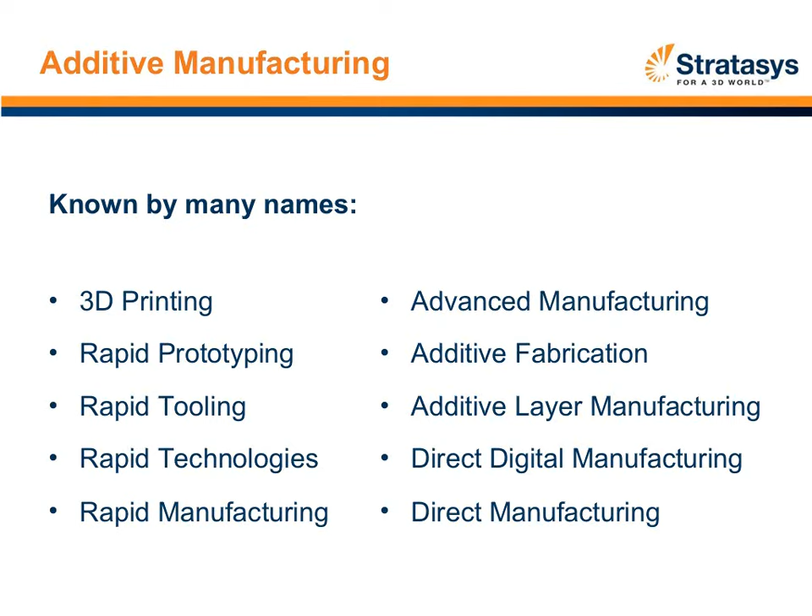So we at Stratasys, and through this presentation, will use the term additive manufacturing to refer to a collection of technologies that I'll explain in a moment. But many of you on the call or in the webinar may recognize some of these other terms: 3D printing, rapid prototyping, are commonly used terms to define what we today in the call will define as additive manufacturing. And what additive manufacturing is to us, it's a collection of technologies that are largely driven by three-dimensional digital data. That's the input. And what the technology does is in an additive process, or a layer-by-layer process, produces a physical part, generally used as a concept model, a prototype, and even in some cases for manufacturing applications directly from that three-dimensional digital data, typically coming from CAD.

So the process generally is three-dimensional digital data in, produce the part in the system or the technology itself, and then usually there's some post-processing that is required. Generally it's a support removal. It could be some other things dependent upon the technology.

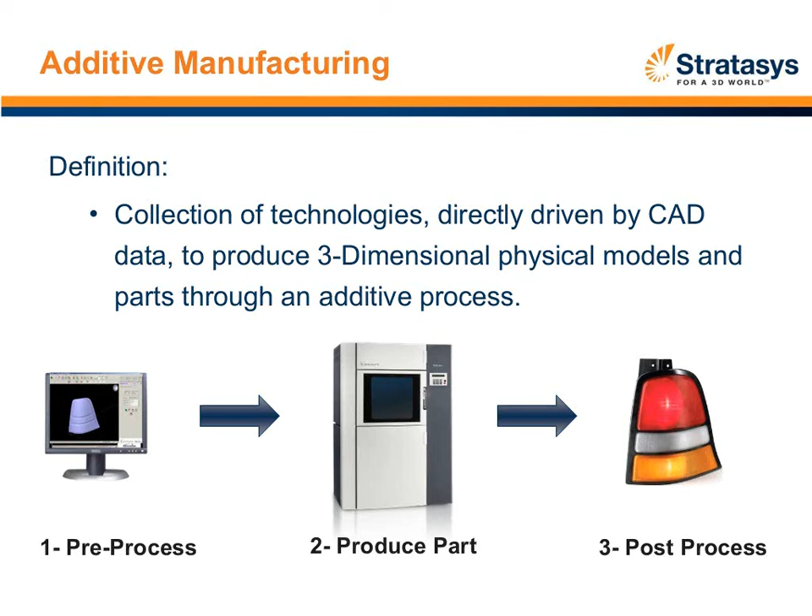In general, if we look at the technologies that define the additive space and the process that many buyers go through when they're considering additive manufacturing, the first is that they will determine whether additive manufacturing is or is not beneficial based upon how they're producing their concept models, prototypes, their manufacturing parts, versus their traditional methods to do that.

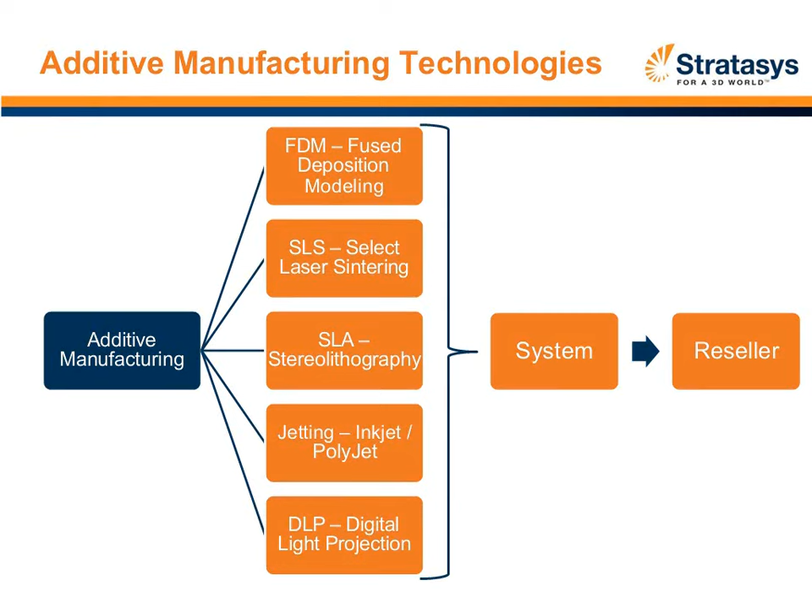As mentioned, these technologies are both distinctly different, yet surprisingly similar. This was one of the fundamental drivers behind bringing these two technologies together: they are very similar from an operational standpoint, but have very different outputs that satisfy different application needs. Together, the two technologies solve a broader array of applications, including manufacturing or factory floor use, concept modeling, painting to look like the final production component, or models and parts with the actual mechanical properties of the final product.

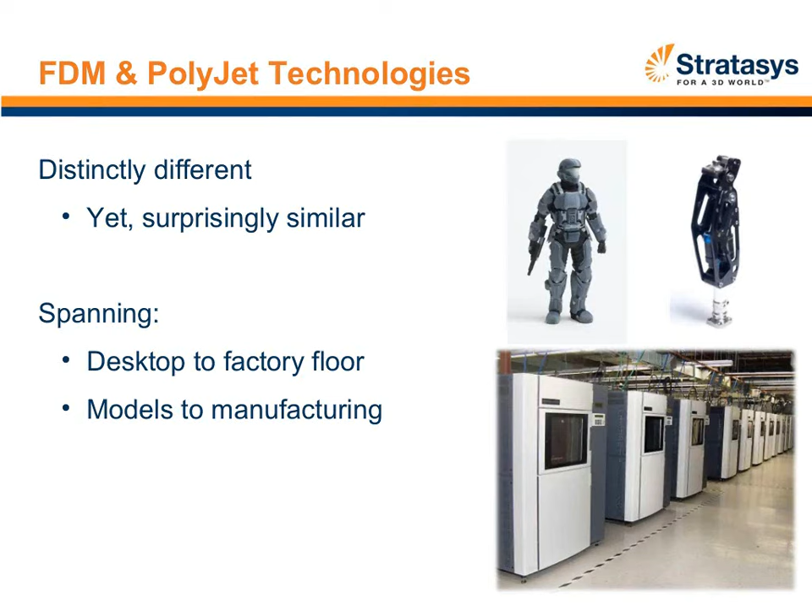So let's talk briefly about each of these technologies and how they work, starting with FDM technology.

FDM, or Fused Deposition Modeling, is an extrusion-based technology that uses a filament of thermoplastic material heated in a liquefier. We very precisely control the location and deposition of the material from the nozzle, somewhat like a two-dimensional pen plotter. We control the deposition of material on a layer-by-layer basis, building the very bottom layer and then extruding the shape of the layer on top of that, repeating the process over and over until the part is complete. So, thermoplastics go in and a physical thermoplastic layered part comes out.

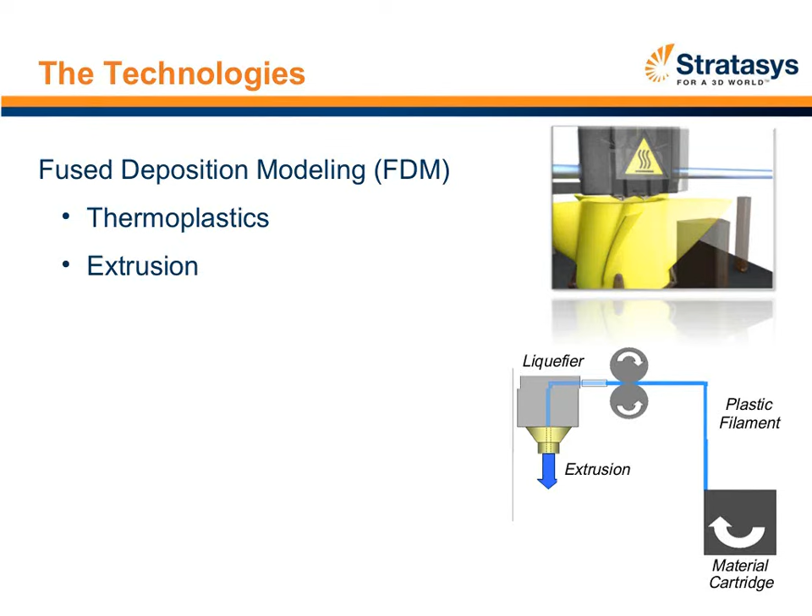PolyJet technology conversely uses inkjet technology to create the shape of each layer. The material used is a UV-curable photopolymer that simulates thermoplastic materials or elastomers. The inkjet head passes over the part and very precisely controls the droplets of UV-curable photopolymer to create the shape of each layer. On the carriage are ultraviolet lights that semi-instantaneously cure the material, creating the shape of the layer. This process repeats over and over until the model is complete. So both technologies work additively, but each uses a unique material and technology to create the parts.

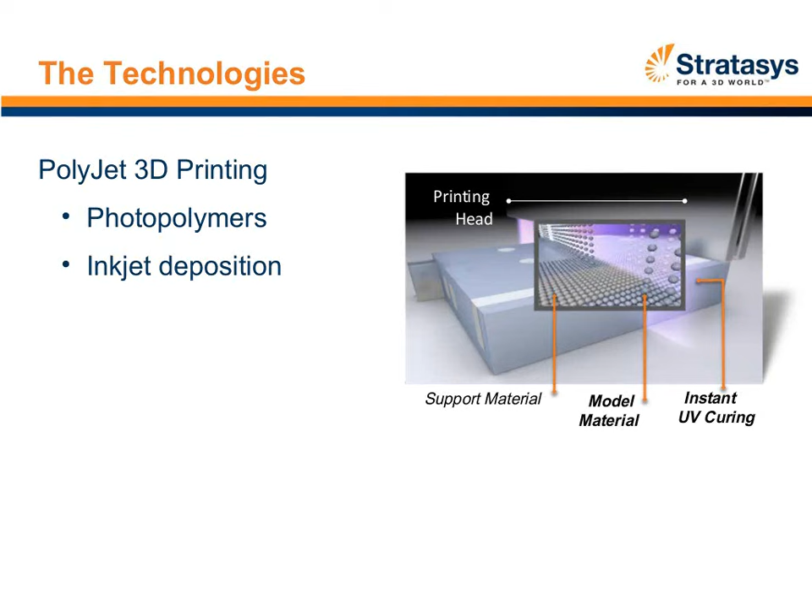Now we'll explore three different categories to help understand where PolyJet and FDM are best fits in the additive manufacturing marketplace. In general, we can organize things into three categories to show both the similarities and the uniquenesses.

Operations, meaning how users engage and operate the system; part characteristics, meaning what's unique about the actual output itself; and material options, the diverse array of materials available to select the one best suited to the application.

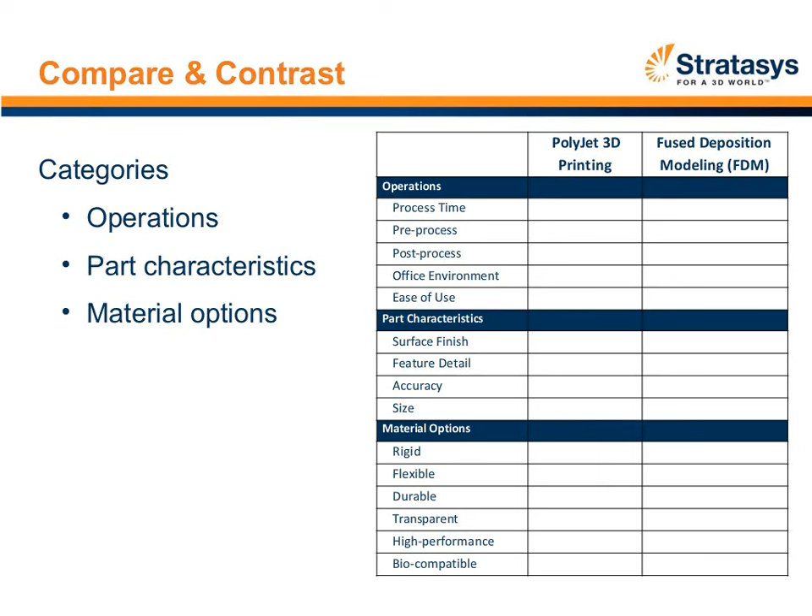Let's first talk about operations and how these are similar. The first category in operations is often called speed, and there are two categories important to understand about speed. All too often, buyers get hung up evaluating the actual build speed itself — how quickly it takes to produce the part once the start button is hit and the model is complete on the system.

This is an important data point, but what's generally more meaningful to evaluate is the total process time — the time it takes to go from the three-dimensional digital data, typically a CAD file, to the physical part or model in your hand that can be used as a concept model or functional prototype. It's the time from the digital file until supports are removed and it's a usable part. That's what we call total process time, and it's most relevant to look at, not just with PolyJet and FDM, but with all additive manufacturing technologies.

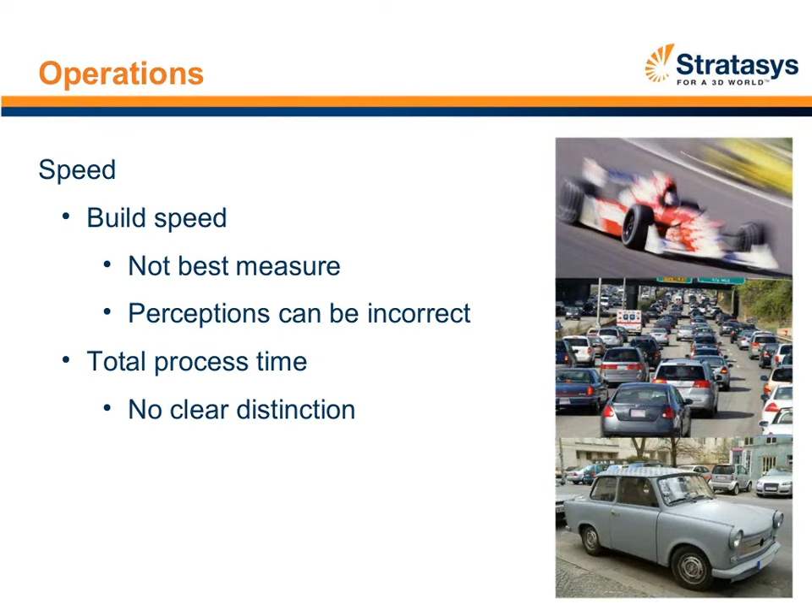In general, PolyJet and FDM are somewhat similar in total process time when printing a single model. Where PolyJet tends to have an advantage is when you build an entire tray of parts — there's a scalability factor where adding more parts to the tray generally makes PolyJet technology, and some other types of technologies, more efficient.

Looking at pre-processing, so this is the process of actually translating the digital file into the data that will run on the system. In general, both are relatively simple and easy to use. There's a software dedicated to both the FDM and the PolyJet systems that take the digital STL file in, and then the user selects their parameters to produce the part and hits print and sends the job to the system.

And in both cases, pre-processing can be extraordinarily simple, somewhat similar and analogous to two-dimensional printing, where you set some very basic parameters, hit print, and the printer continues to do the rest of the work or automatically starts doing the work. One of the differences is with FDM technology in the production-based systems or the Fortus systems. There's a bimodal support software, meaning the software can work in that very simplistic single-button fashion, or with the production systems from FDM, we give users the option to control all of the build parameters.

And this is highly enabling when it comes to advanced applications where the end user can optimize how the part is built to enable the output to work much, much better for, in some cases, basic applications, but predominantly for advanced applications. Things such as thermoforming, maybe cores for composites, paper pulp molding, amongst many, many other advanced applications are enabled as a result of giving access to the operator to control the build parameters of their particular part. Again, both can work very simple and easy, but with FDM production systems, the access or exposure to those controls exists.

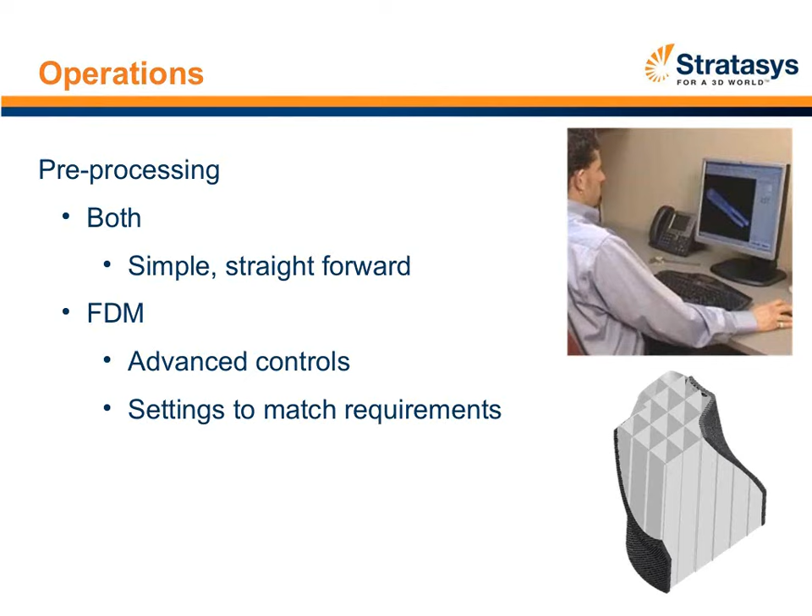Now let's talk about post-processing, or the processes that happen after the model or the part is completed building on the system. And in both cases, both with PolyJet and FDM technology, the post-processing is relatively simple. It's simply limited to removing the support structures from the model itself. This is somewhat unique in terms of FDM and PolyJet technology, where there's no curing or anything that needs to happen to the model to make it strong enough or stable enough to be used as a concept model or a functional prototype.

The removal of supports in PolyJet technology is done in a water jet station or a water jet system. So the gel-like support structures that are used in PolyJet technology are washed away in what is somewhat similar to a sandblasting station, but rather than using sand, it uses pressurized water to break away the support structures from the model itself. The process is relatively quick, simple, and requires an operator for maybe about 15 to a maximum of 20 minutes, depending upon the size and complexity of the part itself.

With FDM technology, there are two different types of support structures. There's a soluble and a breakaway. The soluble support structure, as the name implies, is a type of supports that are washed away in water, heat, agitation, and a chelating agent. So it washes away the support structures in an automated fashion, or it's a labor-free process. That takes generally anywhere from 2 to maybe 4 hours, depending on, again, the size and complexity of the model itself.

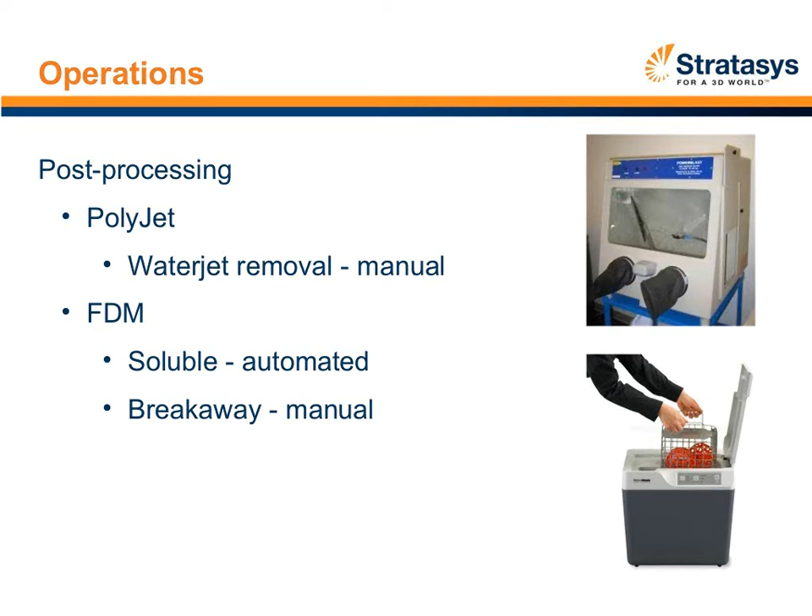So, operations. The other thing is about where the printer can be put in the actual environment itself. For both FDM and PolyJet, one of the strengths when looking at all the additive technologies on the marketplace is the fact that the systems are clean, quiet, and safe. And as a result, they can be inserted not only into, let's say, an RP lab or a manufacturing floor, but they're also safe and convenient for office use. And this is important when considering locating the system closest to the operators or the people who will need to utilize the system, so it's convenient. It can be put in a spare office or maybe in a shared environment with both of the technologies.

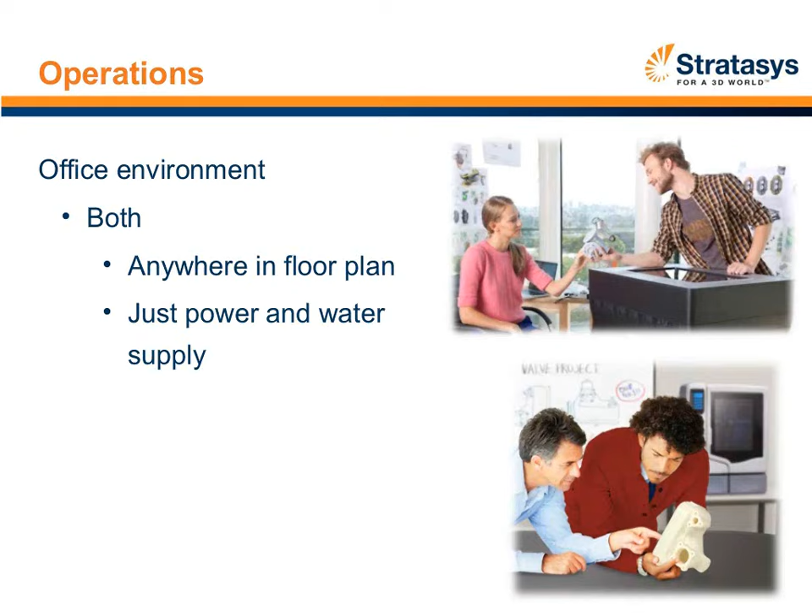In both cases, potentially water or power would need to be plumbed or routed wherever the system, or more importantly, the support removal device is located. So many companies choose to put the printer very, very close to the engineer, designer, or manufacturing folks, and potentially to put the support removal devices in an area that's maybe more convenient from a power and water supply standpoint. So again, easy to put really close to the operators themselves.

From an ease of use standpoint, overall, both technologies are relatively simple. When we talk about the materials that are required to be put into the system to run it, with both FDM and PolyJet, the material or the consumables come in fully enclosed cartridges or canisters, so there's no exposure to uncured resin or the filament of thermoplastic material, so they're safe and very easy to swap in and out of

the system. Changing from one material to the next, so if you're changing, let's say, from black ABS to white ABS, or maybe Vero Blue to Vero White, or for that matter, from one material type to the next material type, is relatively quick and relatively easy for the operator to do as a result. So there's a semi-automation built into both systems to facilitate making sure that process happens simply and efficiently.

In terms of starting a part, both systems are relatively simple. Maybe take a matter of minutes, maybe a maximum of 10 minutes from the time when the job is sent to the system, where the operator is at the system, getting the system prepped and the part started. So really just a matter of minutes to get the part started. Both systems run unattended or lights out, in the sense that there's not an operator that's required to be present. So similar in the sense of two-dimensional printing, these three-dimensional printers or additive manufacturing systems work very, very similar in that sense.

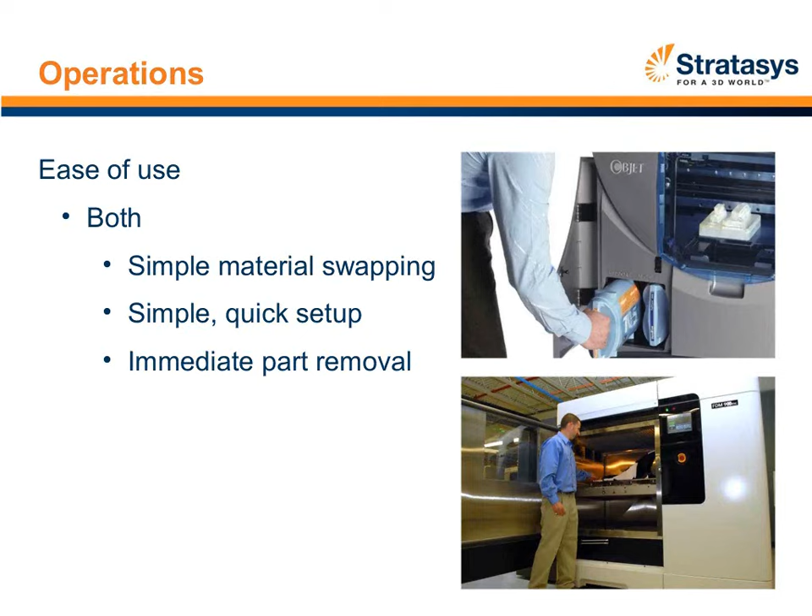Both systems, as we mentioned before, have parts that are fully cured or ready for use directly or immediately while it's being produced. So in both cases, let's say you're building two parts in the envelope concurrently and part A is finished and part B is continuing to build, you can pause both systems, remove part A, resume the printer, and the system will continue to build part B seamlessly. So it enables operators to get their parts out of the system as they're ready.

And then lastly is around operating expense. In this case, this is one of the areas of strength for FDM technology in comparison to all additive systems. FDM technology tends to be one of the lowest operating cost systems or total cost of operation technologies on the marketplace, both from the initial system acquisition, but more importantly, from the ongoing operating expense that's required.

Generally, there's three things for FDM technology that drive the operating expense. The first and the most predominant of which are the materials, right? This is the filament of thermoplastic going into the system to produce the part, as well as the supports. And a much, much smaller component of the operating expense exists around tips. These are the nozzles or the actual orifices in which the material comes out of, and the build sheets, which are the platforms in which you build a part on. So largely driven by materials, but to some extent by tips and build sheets. So again, FDM, very, very low operating expense compared to all the other technologies in the marketplace.

PolyJet technology, the operating expense is largely driven also by materials or the UV curable photopolymer that goes into the system. The print heads themselves, or what's maybe analogous in FDM to tips, or these inkjet printing heads last somewhere in the neighborhood of 2,000 or more hours. So they have a very long life, but they are driven by the operating expense. They can be encompassed into some of the maintenance packages. And there's some miscellaneous odds and ends, small components of hardware that are a really small component of the overall operating expense, things like wiper blades, the roller knife, etc.

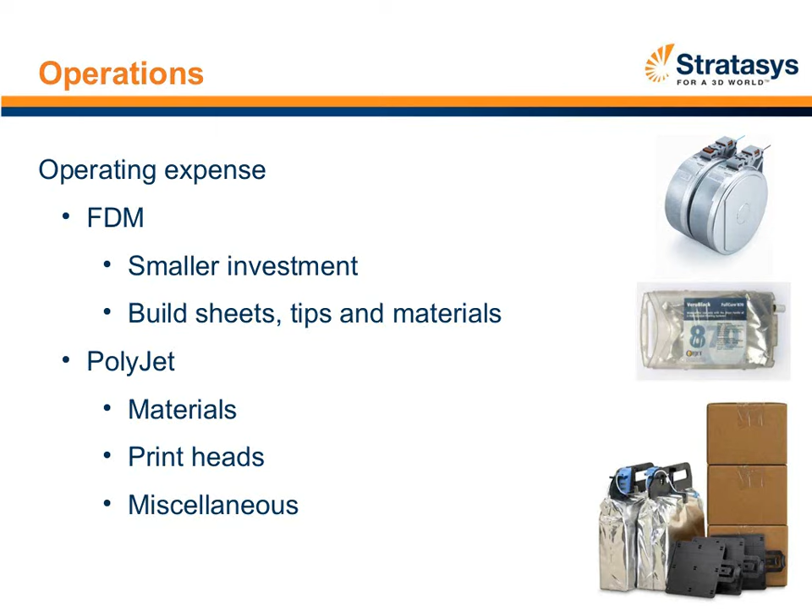So, in summary, looking at the various different operations, in general, both FDM and PolyJet are somewhat similar in the sense of the operations themselves, both from an ease of use, the process time required. Where FDM and PolyJet differ, PolyJet again tends to become increasingly advantageous or efficient as you build not just one model but many models in the envelope concurrently. And then conversely, one of the strengths of FDM in the overall additive marketplace is, of course, the ongoing operational costs as well. But again, both very easy to use, friendly to put in an office environment, and similar in terms of pre- and post-processing.

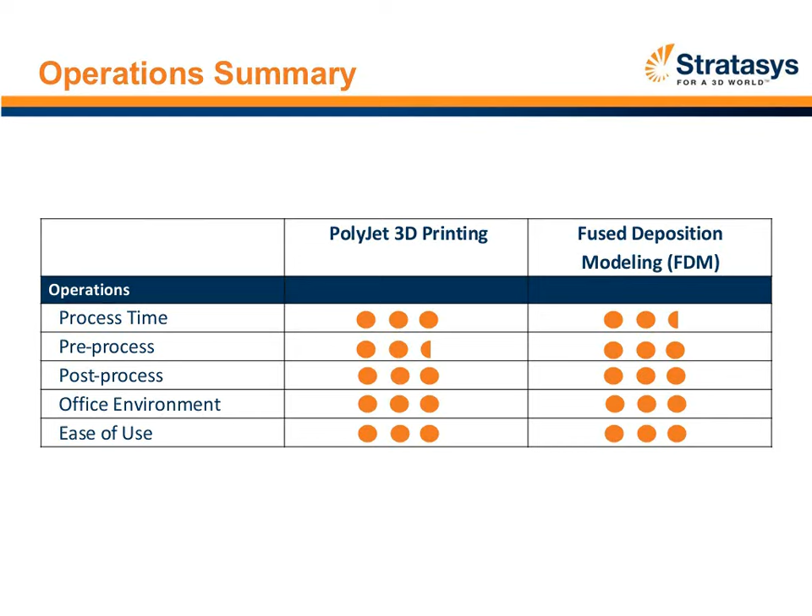So let's switch and talk now not about how the technologies are similar, but maybe where the technologies start to differ. And one of the areas is around the part characteristics themselves. So the first of which being surface finish. Surface finish is one of the things that PolyJet technology owns in the additive manufacturing space. Surface finish is generally largely driven by the layer thickness.

So with PolyJet, it's either a 16 or a 32 micron layer thickness. So as a result, it has very smooth surface finish that's nearly paint ready. The surfaces can be sanded and polished to have almost a glass-like or an injection molded-like surface finish to it. That process is very, very simple and easy to do after the model has been printed.

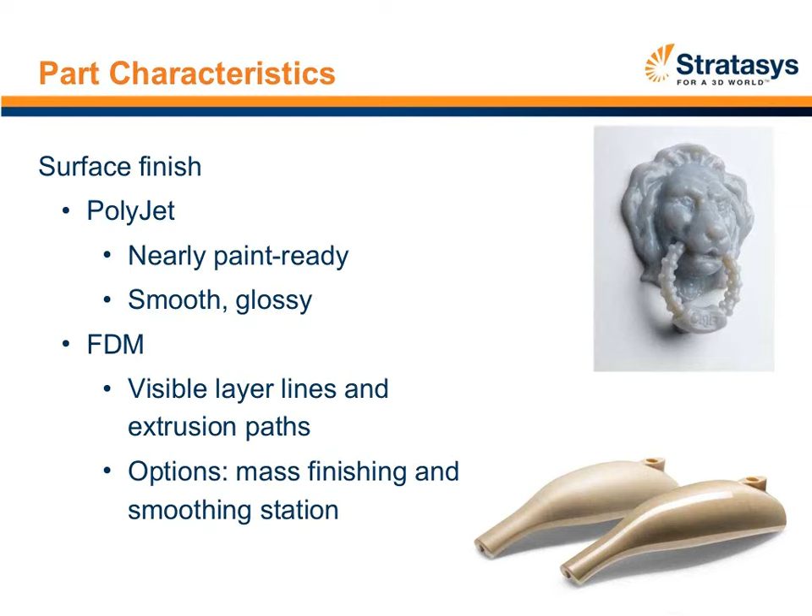With FDM technology, it's building in a slightly larger layer thickness, and as a result, the layer lines directly out of the system are certainly much more evident and visually apparent than, let's say, PolyJet or some of the other additive technologies on the marketplace today. However, over the last couple of years, for those of you who haven't looked at FDM recently, there are a variety of techniques or post-processing technologies that Stratasys has optimized to work with FDM technology.

Specifically, our finishing touch smoothing station, and really one of the more recent technologies called mass finishing, where we're really automating the sanding or the work that's done on the outside of the part to remove some of those visible layer lines and make the part itself ready to be used as a master pattern or ready for paint, as an example, to minimize the amount of filler or time that's required. So again, big strides made in post-processing techniques around FDM to improve the overall surface finish itself.

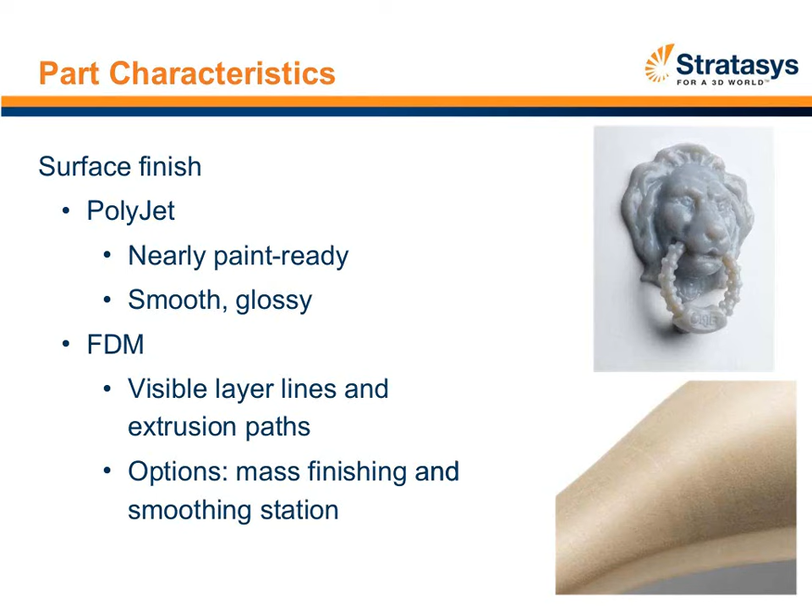And the next part characteristic we'll talk about is resolution and feature detail. Again, this is really driven in this case by both the dots per inch or the minimum bead width that either PolyJet or FDM technology can build. In general, this is another area where PolyJet technology tends to shine. Things like text, small texture, pins, so very fine features, let's say smaller than 40 thousandths of an inch, generally tend to be best suited for PolyJet technology. So if that's something an end user needs to do on a very regular basis, PolyJet may be a better solution in that case.

If it's just occasional and the output needs to be more mechanical and structural, then FDM tends to own that with things like ribs, bosses, gussets, maybe where actual screws or mechanical fasteners or clips and brackets are going to be put together. FDM technology can oftentimes be best suited for that when looking at all the technologies on the additive manufacturing market.

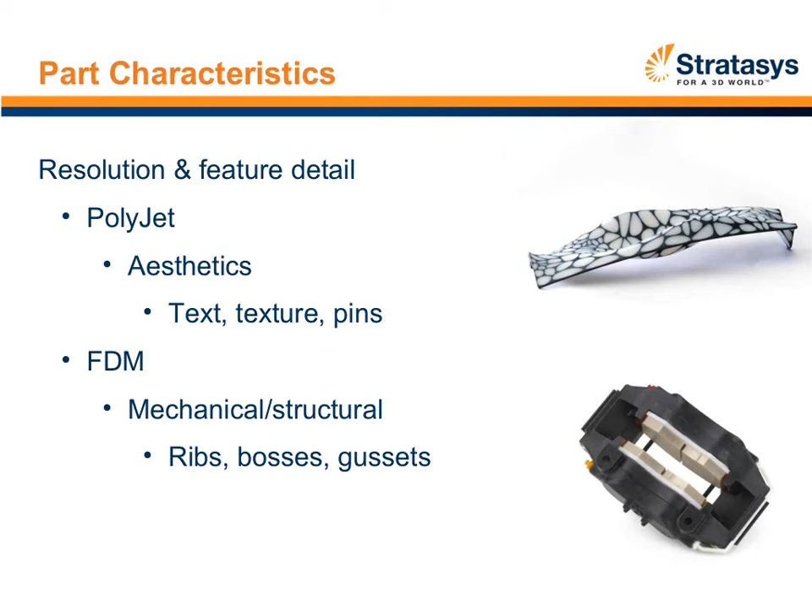The next is accuracy, and resolution and accuracy are oftentimes misunderstood or intermixed. What we previously talked about with resolution and surface finish is largely driven by the layer thickness and isn't necessarily directly related to the accuracy of the part. So accuracy being how close the actual output is to the nominal dimensions of the digital file coming in, or the STL file. So how close to, let's say, 1 cubic inch or 25 cubic millimeters is this particular part.

Both FDM and PolyJet technology, when looking at all the technologies in the marketplace, are very similar and very good in the sense of the accuracy coming directly out of the system. Where FDM generally tends to shine is the stability of that part over time. Since FDM is using a thermoplastic material, that generally tends to be more stable in a broader range of heat, ultraviolet, humidity, and maybe even mechanical pressure exposure.

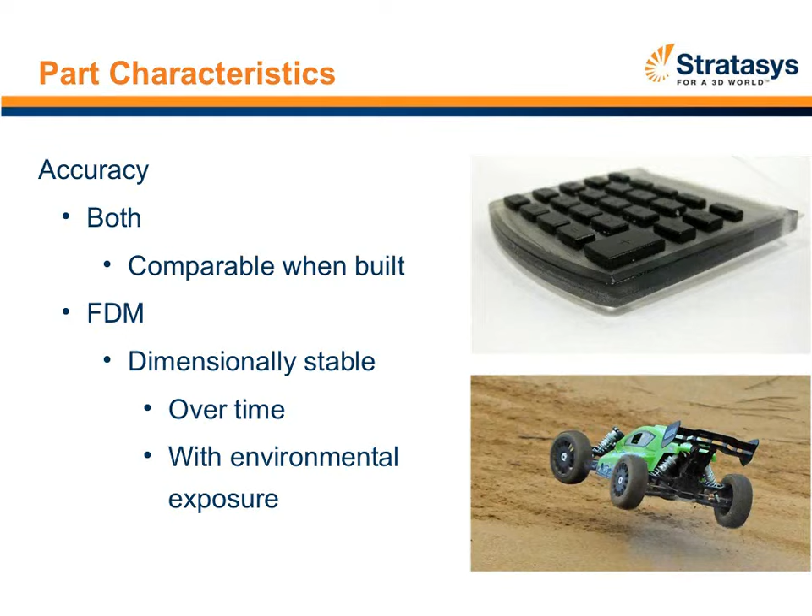FDM tends to be a more dimensionally stable material over time with these exposures, where some of the other technologies on the marketplace, either photopolymer-driven or even in some cases powder-driven, tend to be less stable. So FDM really owns dimensional stability over time. But both technologies have very dimensionally accurate output directly out of the printer itself. So if it's a short life expectancy, either technology can work really well. If the part needs to survive for not days, but weeks or months, then FDM technology tends to be a better solution, or oftentimes chosen as a result of its stability over time.

Next part characteristic we'll talk about is part size. For both FDM and PolyJet, the systems and printers available have a wide range of build envelopes, ranging from about 400 cubic inches all the way up to 18 cubic feet, or 6,550 cubic centimeters, up to almost half a cubic meter in volume. This wide range allows buyers to select an envelope best suited to the size part they're producing or the number of parts they want to produce on a regular basis.

In both FDM and PolyJet technology, parts can be built in multiple pieces and bonded together afterwards, if the part size happens to exceed the envelope itself. One thing to consider is the actual envelope dimensions. While the cubic size is similar with both FDM and PolyJet, they vary somewhat in terms of X, Y, and Z size, so the size of part being built, or the orientation in which it's built, can be an important factor to consider. Our spec sheets are helpful in listing those cubic dimensions and the relevant orientation.

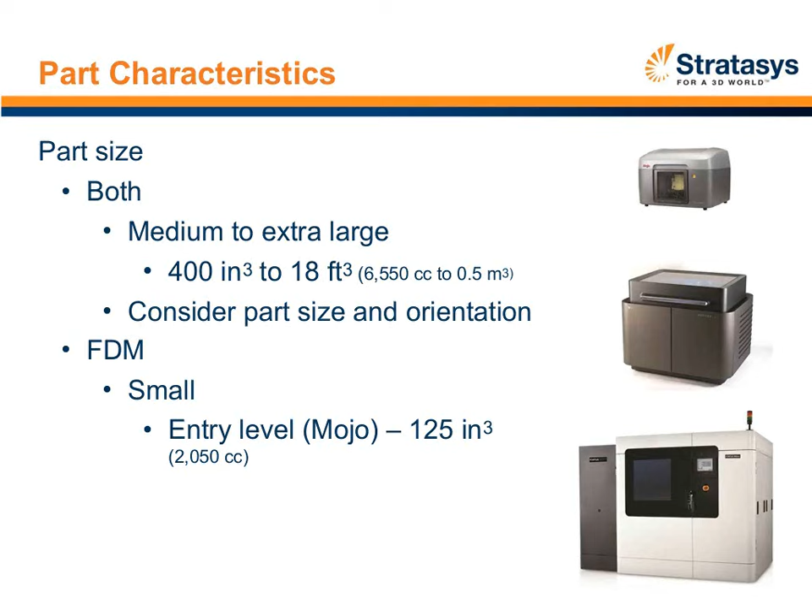In summary, looking at the part characteristics, this tends to be where both FDM and PolyJet technology differ in the additive space. Surface finish and feature detail are largely the two primary reasons why PolyJet technology is chosen in the marketplace, while the accuracy and stability of FDM models and parts is one of the primary reasons why FDM is chosen. In both cases, they solve a similar range in terms of size of parts that can be produced.

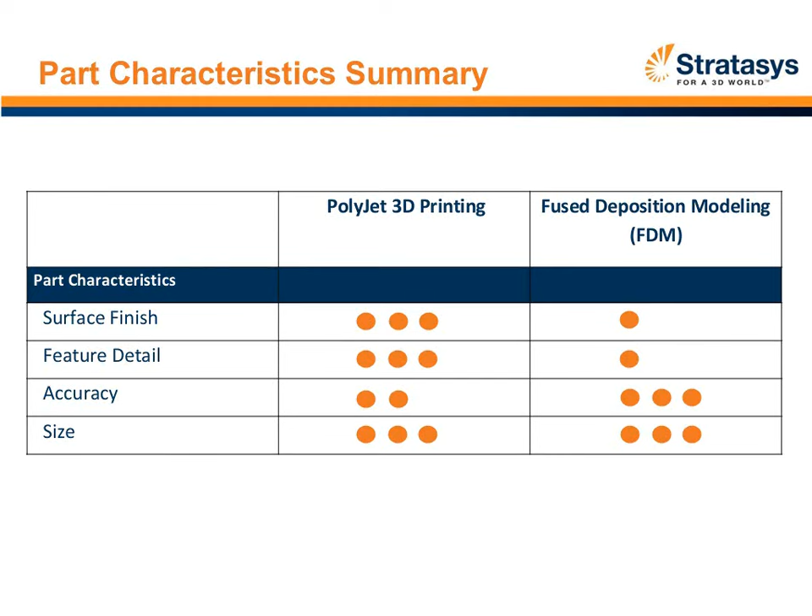The last category we'll talk about is materials, or the materials available to run in the FDM and PolyJet systems. In general, there's a wide variety of materials available for both. In total, over 130 material options exist for photopolymers and thermoplastic materials. The photopolymers can be produced in two different material categories: primary materials and digital materials. Primary materials mean printing the model in a single material, while digital materials for photopolymers involve blending two different model materials together to produce the part, enabling changes to color, grayscale, or physical properties.

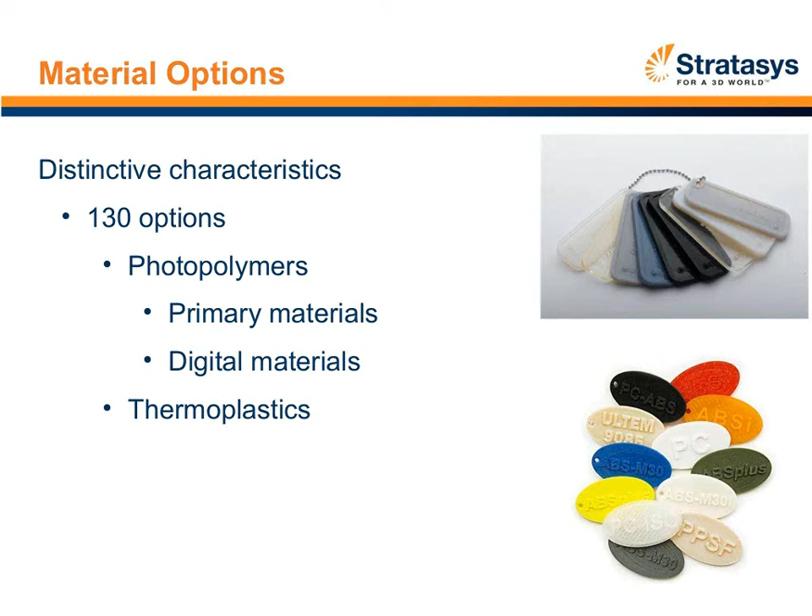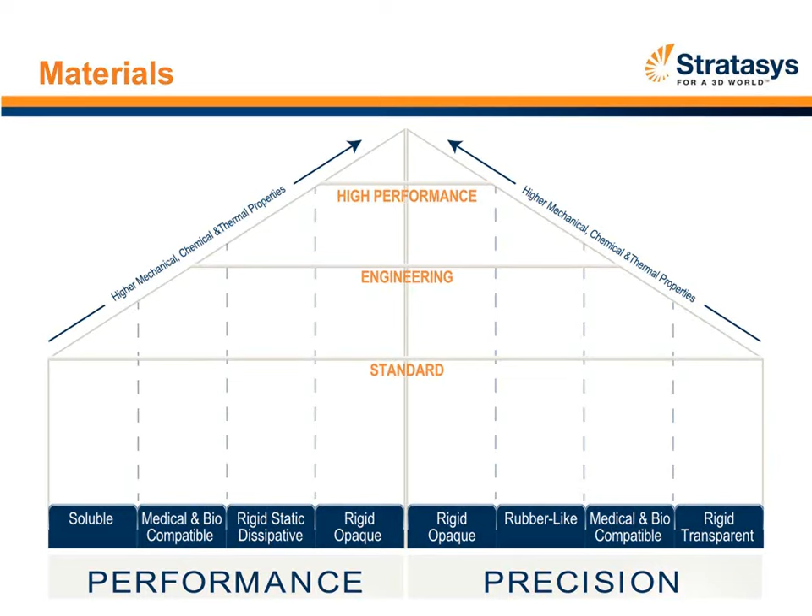Let's take a look at the FDM and PolyJet portfolio of plastics. If we plot those materials on a classic materials pyramid, with standard, engineering, and high-performance materials, as you work your way vertically up the pyramid the materials become increasingly comprehensive in terms of their mechanical, chemical, and thermal properties. Both FDM and PolyJet have a portfolio of materials that fall into the standard category of plastics and photopolymers.

FDM also has materials that fall into the engineering and high-performance category of plastics. In general, that drives FDM to be defined for performance-based applications. PolyJet, as mentioned earlier, is driven by precision-based applications that maybe don't require as much mechanical, chemical, and thermal stability, but benefit from the surface finish and feature detail discussed earlier. In both cases, there's a wide range of materials in terms of characteristics, driven by categories like rigid opaque, medical biocompatible, static dissipative, and rigid rubber-like. This wide range of plastics and photopolymers allows the engineer to choose the material best suited for their particular application.

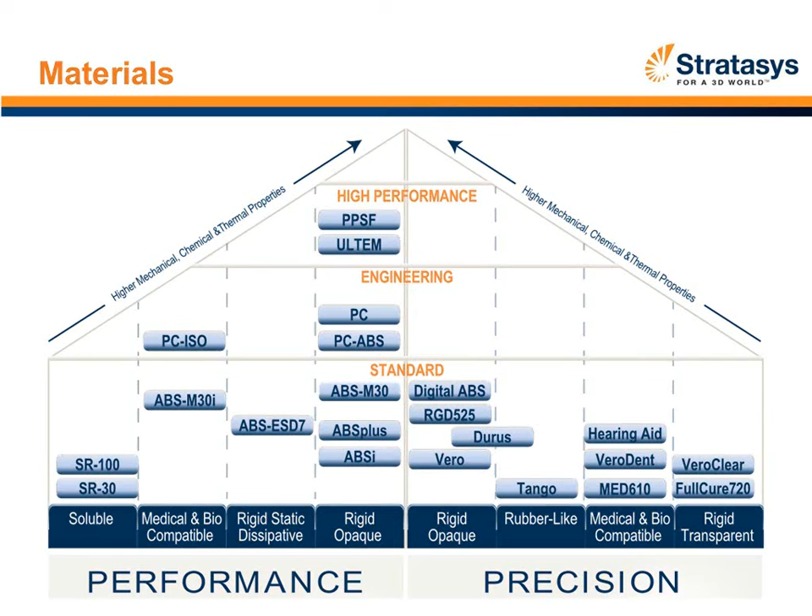So let's take a look at the PolyJet photopolymers. In general, as we've referenced earlier in the presentation, PolyJet is all about simulating the look and the feel of the actual product itself. So it comes very close in terms of the aesthetic output from injection molding or traditional manufacturing-based technologies.

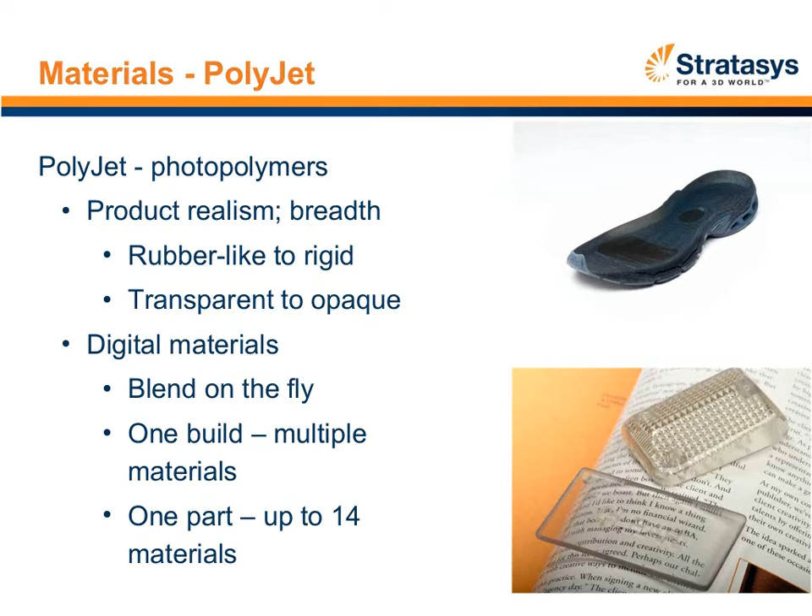There are a variety of different material types that allow the end user to produce parts that simulate elastomer or rubber-like materials, or produce a rigid part, as well as change the transparency or the opaque nature of the output itself. Now, that's done in general by the primary materials, by building a part from a single material.

What makes PolyJet technology unique in the additive manufacturing marketplace is the ability to produce parts with digital materials, or blending parts or droplets from material A and droplets from material B. By doing this, it enables the end user or the technology to change the output in terms of the actual durometer of the rubber-like part, the grayscale of the component, and the mechanical properties of the part itself.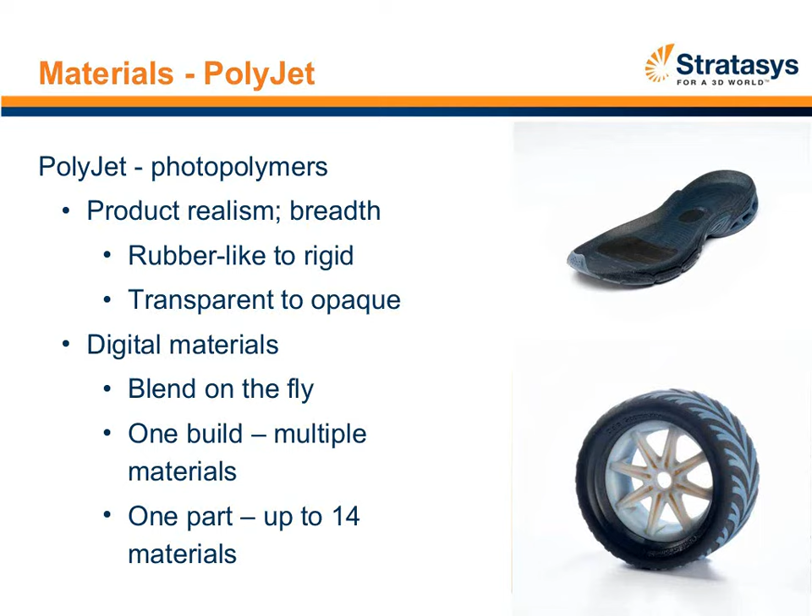So that is done, they're simultaneously jetted at the same time, and the part coming directly out of the system looks exactly like that. It's a compilation of those two materials. So it's an extraordinarily enabling capability that PolyJet technology owns, and really enables the optimization of color, grayscale, and mechanical properties of the part, and specifically the durometer of the rubber-like part itself.

Taking a look at FDM materials, again, in this case, it's all about the performance, both from a standard engineering and a high-performance suite of plastic materials. So from ABS through Ultem, these materials generally tend to meet the most demanding application needs in terms of mechanical properties, chemical and thermal stability.

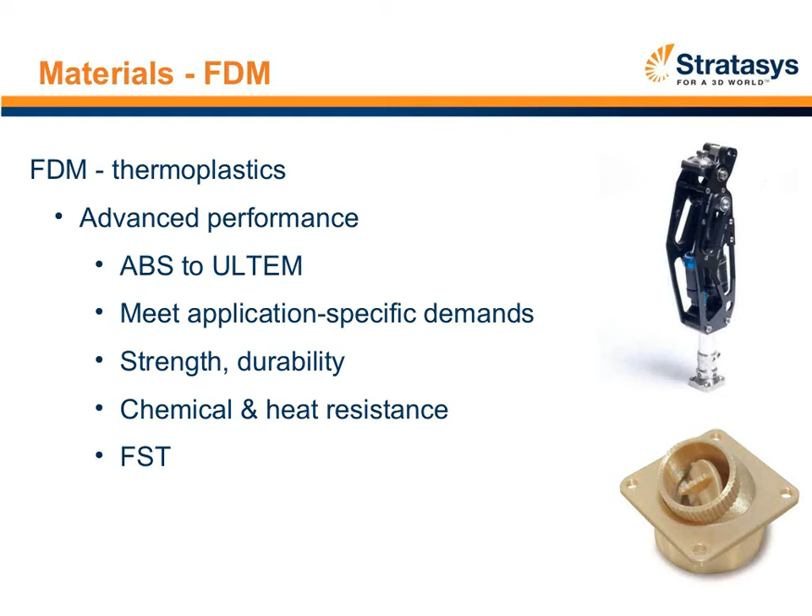So these parts are strong, they're durable over time, and in many cases they have unique certifications like flame, smoke, and toxicity certification for transportation-based applications, biocompatibility certifications, amongst others. So in general, where it's demanding performance requirements, FDM output generally tends to be one of the most chosen technologies in the additive manufacturing space.

So in summary, if we look at both PolyJet and FDM technology side by side in terms of their materials, both have rigid materials, the PolyJet technology having a flexible material, FDM material having the most stability and durability over time.

If you're looking for transparency, PolyJet technology is generally the best technology in high performance. FDM generally tends to be the best technology in the additive space. Both of the technologies have biocompatible materials that can be used for medical-based applications that come in proximity or in short-term contact with tissue or skin.

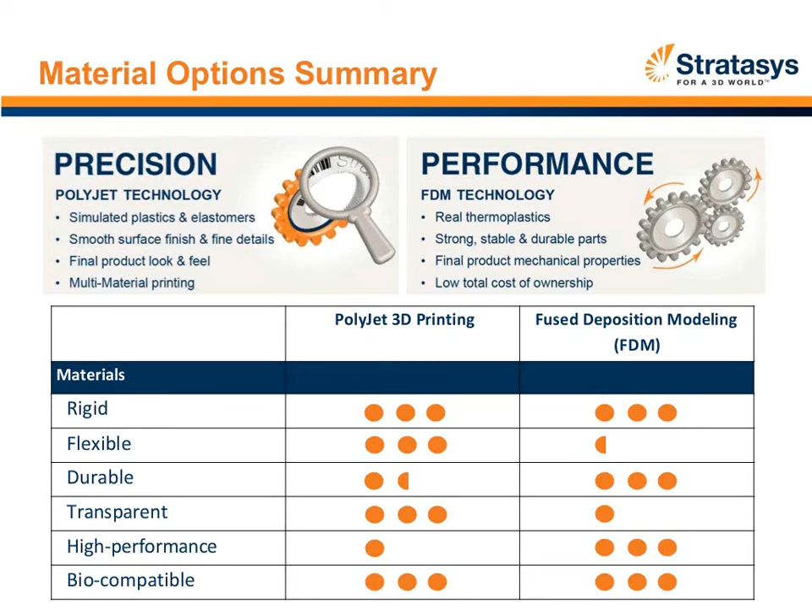So in summary, both FDM and PolyJet technology are similar in the sense that they're very friendly, office-friendly, easy-to-use systems and technologies that make the production of models both for concept modeling, for functional prototyping, as well as for manufacturing-based applications very simple and easy, generally saving time and saving money in comparison to traditional methods.

PolyJet and FDM technology tend to be some of the most purchased technologies on the marketplace, owning over 50% of the additive manufacturing system sales in the marketplace today. And by combining these two technologies, it allows Stratasys and then our customers to solve a very wide range of application needs, whether they be flexible parts, rigid and durable parts, translucent or transparent parts. FDM or PolyJet technology generally tend to solve that application spectrum very well.